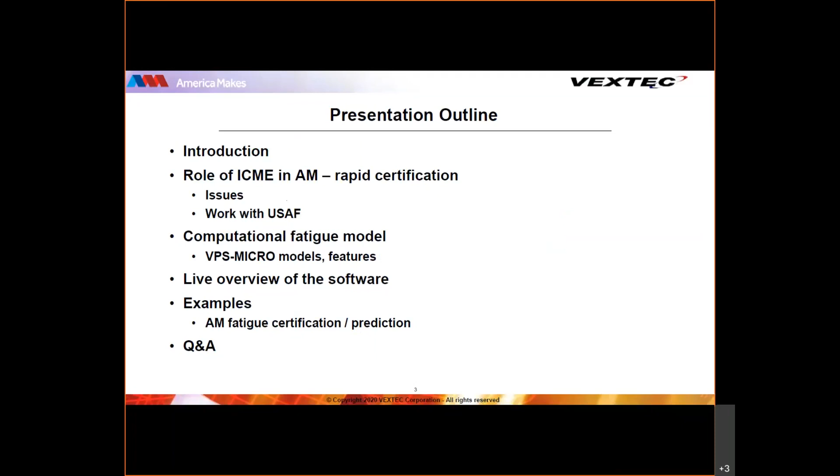I'll first hand the presentation over to Animesh, who will give you a brief introduction of our company, as well as describe what we mean when we talk about incorporating ICME into an AM certification process. We'll also discuss our ongoing AM work with the U.S. Air Force. Then you'll hear from Bob as he introduces you to our ICME-based software, which is called VPS-MICRO. I'll return at the end of the presentation to go through a live demonstration of our software with a real-world example of an additively manufactured titanium alloy. And then we can wrap up with some questions. So, Animesh, the floor is yours.

Mike, as an introduction, Vextec is a software as a services company out of Nashville, Tennessee. As Mike said, our software is VPS-MICRO. It is a computational tool to predict the risk of failure from metal fatigue. And the value proposition for using VPS-MICRO is to supplement physical testing for accelerated part qualification with increased confidence.

Over the past 2 decades, we have successfully helped clients all over the world across different industries, ranging from aerospace, medical devices, heavy machinery, where the risk and potential consequence of metal fatigue failure can be high. This technology of ours has matured and been validated through several Department of Defense programs, and Vextec and VPS-MICRO is backed by 7 US patents. Next slide, please.

So taking a closer look at how our clients benefited, I mentioned earlier that the value proposition is to supplement physical testing. Specifically, VPS-MICRO has been successfully used in qualification of new materials. Often people refer to it as second sourcing as well. In a very similar vein, recently our clients have also used the tool to certify AM materials. Again, it is very analogous to second sourcing, where we're attempting to replace perhaps the original cast material with equivalent AM materials.

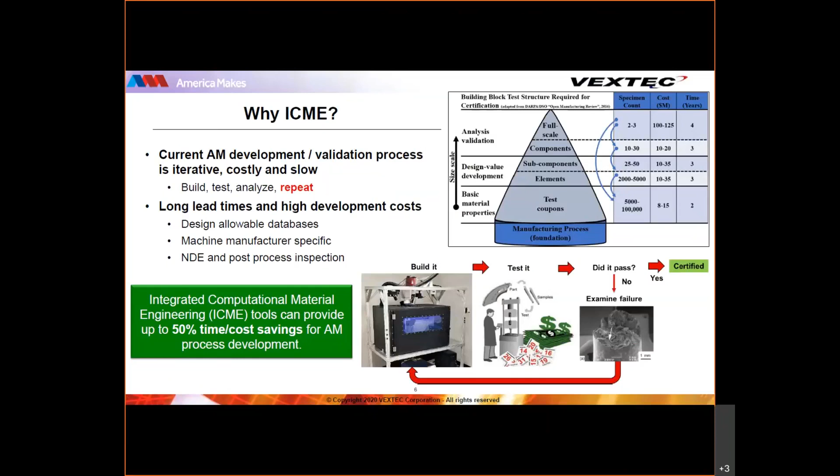So what do we mean when we say ICME-based certification? We are not changing the required elements of a certification process. Instead, the focus is to use simulation and appropriate software and computational tools to gain confidence in the build process. And then once one sufficiently understands the initial uncertainties and their sensitivities, especially in the context of AM, the speeds, the feeds, how it then impacts the resultant material microstructure variability. And then from the resultant microstructure, how does that impact the fatigue performance?

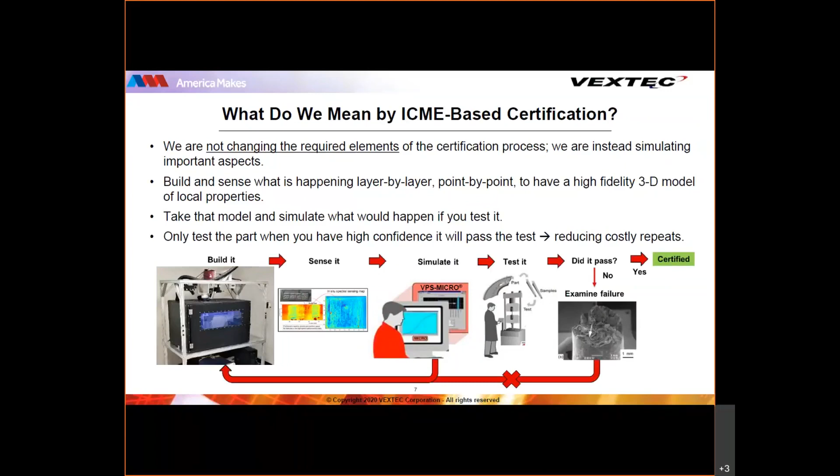If this cycle of build, sense during build, simulate, and then repeat till we gain adequate confidence, we should be able to accelerate the certification process. Next slide, please.

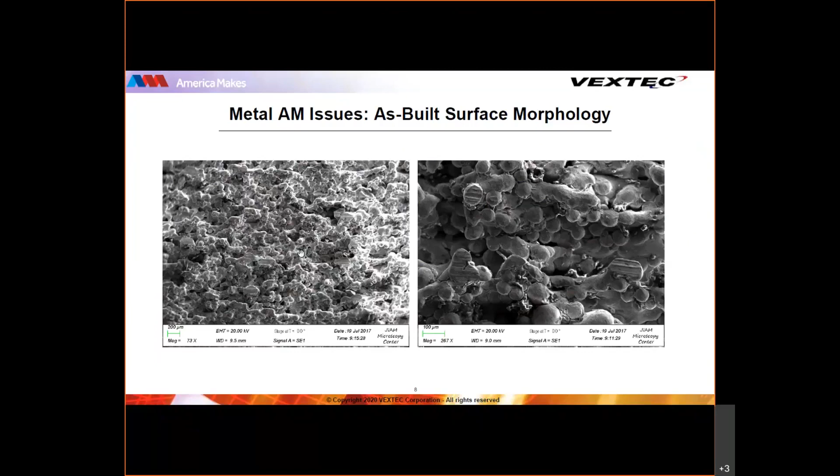So what becomes readily apparent in this kind of a modeling technique is those raised bumps are really not important as far as carrying the stress. They have the lowest stress. However, those holes, the ligaments and such, they are the ones where there is stress concentration. And if we can characterize the uncertainty in these stress concentration profiles, both in terms of the magnitude and the die out, and be able to incorporate this in a computational model, we should be able to computationally and distinctly predict how the rough surface would impact fatigue performance. And later you'll see Mike will show you an example of how this can be incorporated into the model.

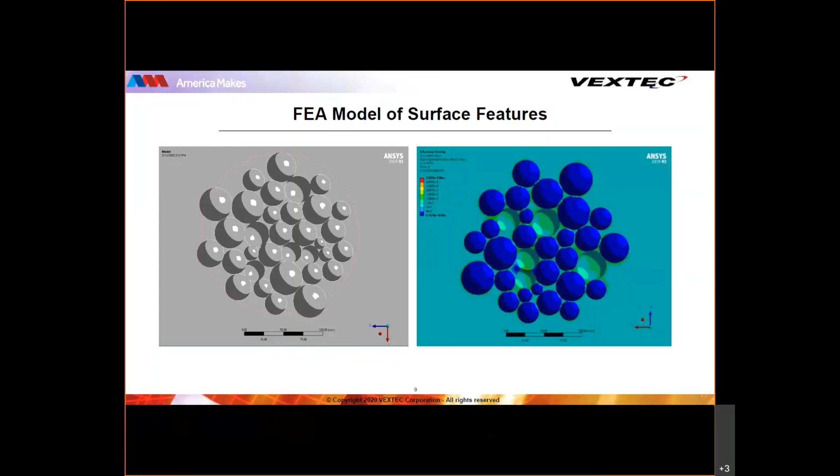And based on experimental data, it has been observed that when the build direction and the loading direction are perpendicular, this material exhibited higher tensile strength and a smoother fracture surface, as opposed to the other case where they were collinear or parallel. It had a slightly lower tensile strength. There were build defects that became active, and it had a rough fatigue fracture surface. Again, empirically and through observation, we understand that.

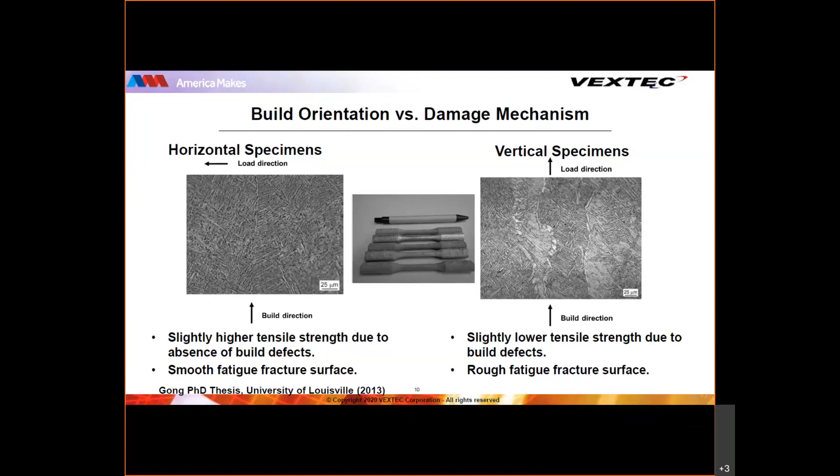Next slide, please. So all of these issues that I just mentioned are active areas of research, and Vextec is involved with the U.S. Air Force to investigate and formulate solutions based on mature software tools to see how these tools can be linked together in a computational sense to accelerate and scale up metal additive manufacturing.

One such program is with the Air Force Life Cycle Management Center, the Rapid Sustainment Office. Vextec is partnered with UTC and UDRI to create a rapid qualification framework for metal additive manufacturing. The goal here is to demonstrate where computational tools, from in situ sensing to looking at post-build microstructure and then eventually linking it to the fatigue performance, how can tools such as ours and others be used to accelerate and scale fatigue performance?

Another program with the AFRL is to look at specifically how, as I showed you earlier, surface morphology can be put into the model in a mechanistic or computational sense and characterize its sensitivity and resultant performance on fatigue properties.

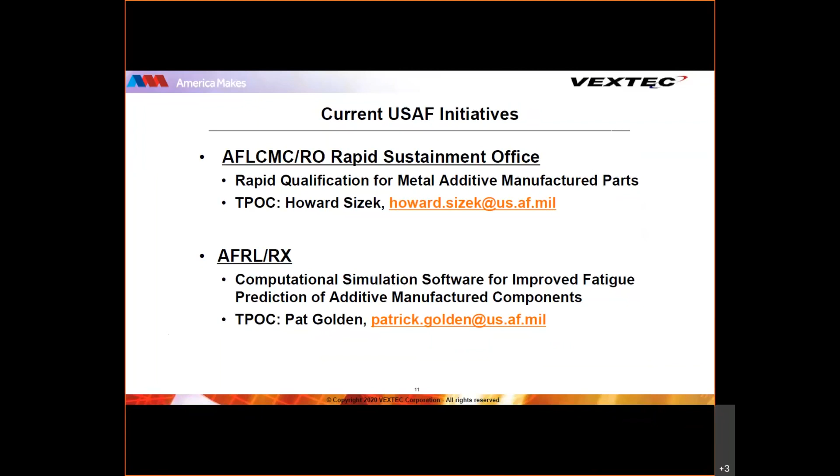So with that bit of preamble of what we mean by ICME-based certification and a few issues, I'll turn it over to Bob now, and he will give you a more in-depth overview of the VPS-MICRO modeling paradigm and underlying mechanisms. So Bob? Okay, thank you, Manimesh.

As Manimesh said, I'll give an overview of the software product VPS-MICRO. And just as FEA models the geometry and strength and loads of a macrostructure, VPS-MICRO models the geometry, strength, and loads of a microstructure. If you were to view a metallic product under the microscope, you would see this seemingly random arrangement of grains, grain boundaries, pores, inclusions, and such. And it is this microstructure that really governs fatigue cracking.

And it's the random nature of this microstructure that drives the large uncertainty that we see in fatigue lifetimes, which makes fatigue testing so expensive and time-consuming, because you have to test a lot of specimens for a long time to understand what the true minimum fatigue properties are. Now, how does all this go about affecting product certification?

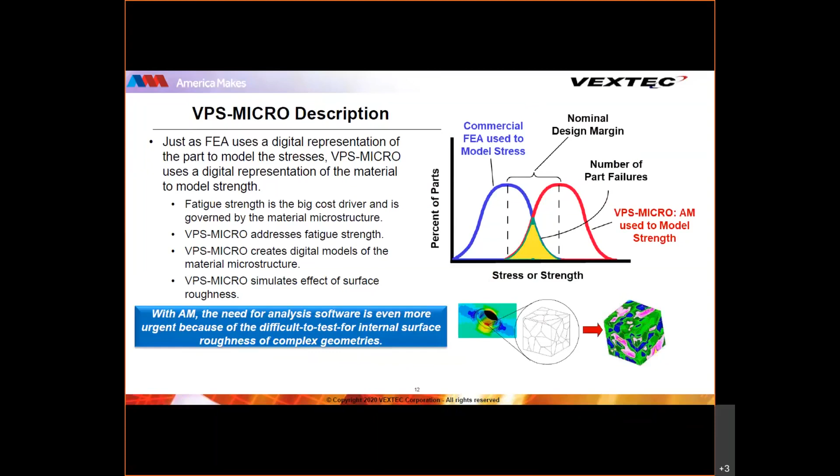So VPS-MICRO takes the traditional FEA-based structural analysis and superimposes at the elemental level the microstructure of the material to predict the statistical distribution of fatigue cycles to failure. And to do this, the software simulates the damage accumulation process, starting at the initial crystal plasticity to nucleation of a crack, to small flaw fracture mechanics, to linear elastic fracture mechanics. So it follows that process through its various stages.

And not only can this be used to predict the risk of failure of a structural feature, but it can also be used, in the design sense, to know what microstructure is allowable at each location of a part. And this is especially important in AM metal products where the microstructure can vary throughout the part depending upon where that location is on the build plate, how thick that particular location is, and during the processing, the heat transfer that takes place in the creation of that microstructure.

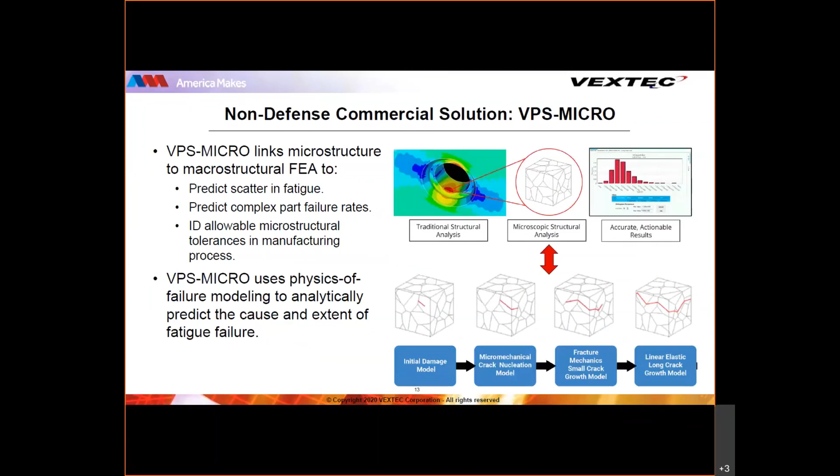Now, in recognizing the product failure as a process and not an event, and that there's much uncertainty in each stage of that process, to simulate the risk of failure, we need to propagate the uncertainty from process model to process model. By process model, I mean the actual failure process modeling, which can start with the uncertainty in the FEA model, including uncertainties in geometries and loading. And this is used along with the uncertainty in material microstructure, and also the uncertainty in the models themselves, modeling uncertainty, but propagating that uncertainty from all of its sources to the uncertainty in the final result, which is cycles to failure. And by considering the failure process, we're able to use all of the available knowledge.

And by using physics-based computational models, we're able to explicitly propagate uncertainty from various failure processes to the others. And then when new models or new data become available, the process modeling can be updated such that you can bring all of that new knowledge into it. And this is kind of what's going to be called the digital twin. And these are kind of the elements of the digital twin. So if you think about it, we're kind of building part of the digital twin of the AM product.

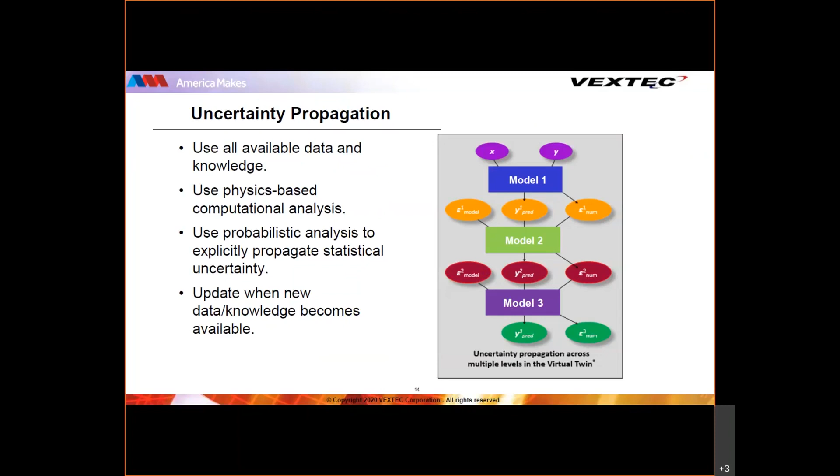And although connecting rods have been around for a century, and of course cast iron has been around for millennia, our customers have still been able to use VPS-MICRO to optimize the design of something as traditional as a cast iron connecting rod, because the model allows you to recognize that the material properties vary dependent upon the location of that casting. And you don't have to assume minimal material properties throughout the casting. And thus you can optimize and make lighter that connecting rod, which makes it easier to certify that rod for use.

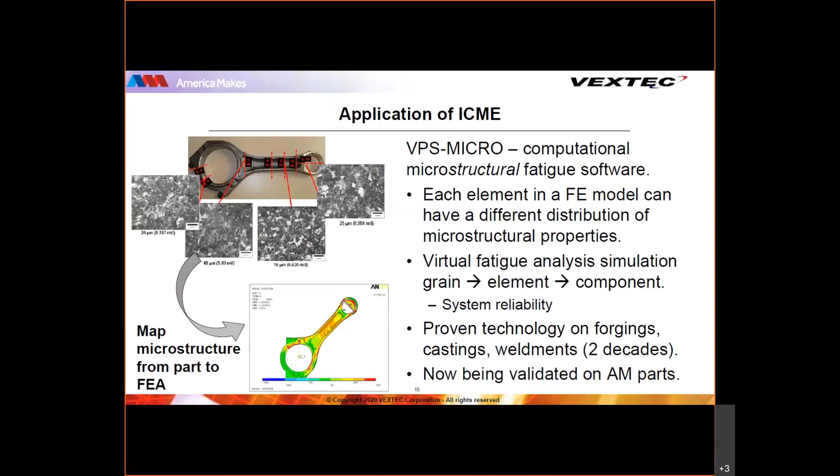And we've also noticed a lot of similarities with actual forgings, because we've found that the difference between a conventional process metal and AM metal can be captured through the quote-unquote microstructural definition. And here's a case where we've got a beta annealed forged Ti-6-4 from our material library, and it has many attributes similar to an electron beam melted AM Ti-6-4.

The difference is that there can be differences in grain sizes. A lot of times the grain size is an order of magnitude smaller because of the quick cooling rates of the EBM Ti-6-4, but also the effect of defects. And there can be trapped gas, porosity, unmelt particle inclusions. And if you can identify and capture those and put those into your model and use as a baseline the forged Ti-6-4, we've been able to model the AM Ti-6-4. And this is an example that I'm going to hand back to Mike, and he's going to actually show how we can go about doing this.

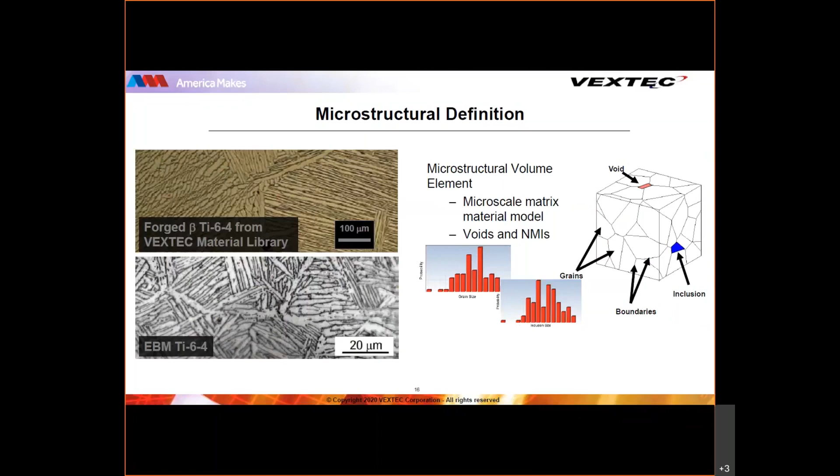We'll look at simulating 100 specimens for each load level, and if you think about how much time and cost that would take if you were to physically perform these 600 total tests, that's quite significant. We'll then move on to showing what simulations of EBM Ti-6-4 would be and how they would differ from the forged condition. So with that introduction, I'm going to move into the live software and give a quick overview.

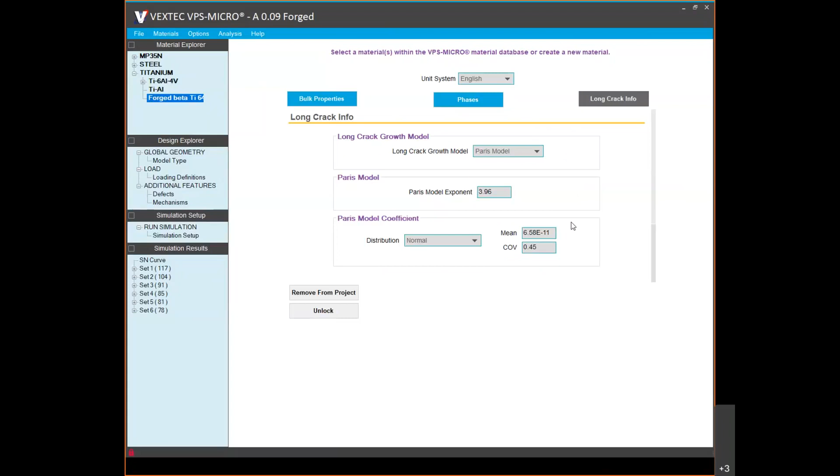And all of the dozen or so material property inputs that you see here are accumulated through standard ASTM type tests like metallography, tensile testing, fatigue crack growth testing. And the material parameters you see here are for our forged beta Ti-6-4 specimen. Below the Material Explorer, you'll see the Design Explorer. And this is where inputs such as global geometry are found.

As you recall from our example, we'll be modeling constant stress fatigue specimens with our gauge surface area of 0.09 square inches. If we wanted to model larger specimens, we could use the area factor here and put in a value greater than 1. If we wanted to model more complex geometries like notches, bolt holes, or the like, we could use outputs from a commercial FEA package like Abaqus and ANSYS. Vextec has developer partnerships with these organizations.

The next step in the Design Explorer is the Loading Definitions page, where we'll be defining the 6 constant amplitude load levels in our example as maximum and minimum stresses for each level. Here you can see additional options in the software for variable amplitude loading, sometimes referred to as mission loading or duty cycle loading, as well as gradient files. If a specimen or a component does have a stress profile, like surface roughness due to the AM process, as Animesh described earlier, or an induced residual stress due to surface enhancement, like shot peening, those can be accounted for here.

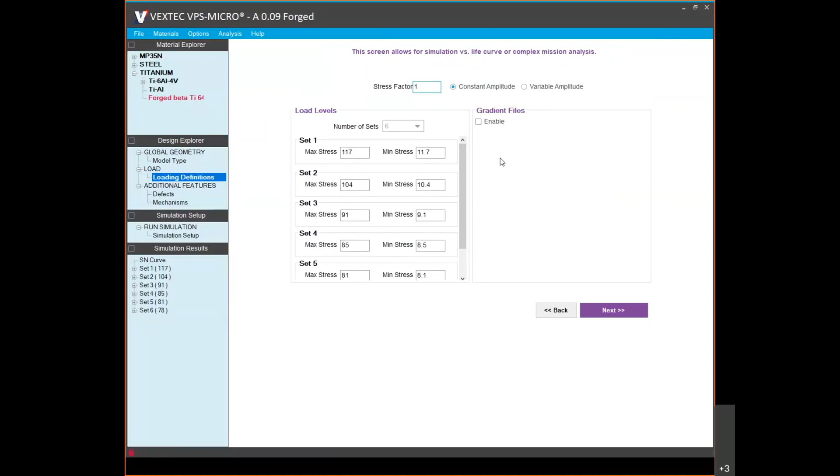And the final step of the Design Explorer are additional features like defects: the probabilistic population of these microstructural defects, the voids, the pores, inclusions, the non-melt areas, as Bob described. For our forged example, we have none of these. Also, there are asperity factors available, which model the tortuosity of the fatigue cracks as they propagate.

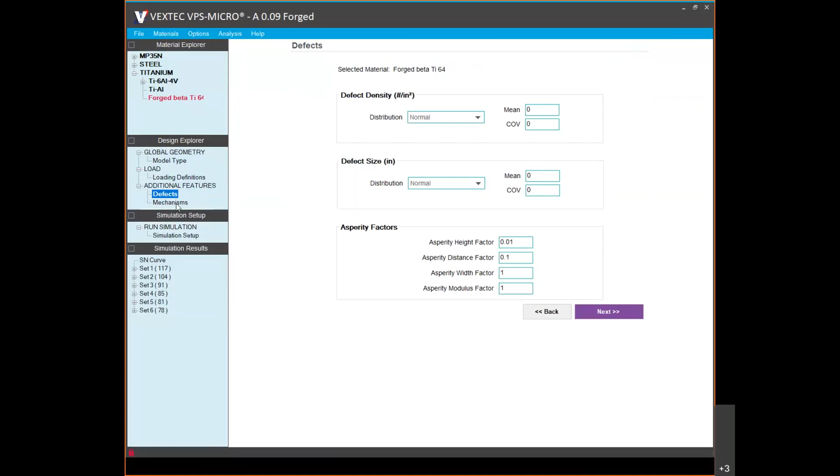Other features in the software include the options for computationally modeling the individual fatigue stages, the crack nucleation, small crack growth, and long crack growth, as well as custom geometry factors or beta factors in the fracture mechanics simulations that VPS-MICRO performs. So having put all of our inputs in the model for our example, this forged beta Ti-6-4 material, as well as the geometrical parameters of the fatigue specimen itself, we come to the simulation setup page. And this provides a summary of all of the main inputs for the model and lets you know if there's something missing before you commence running the simulations.

And as I said at the outset, we'll be simulating 100 simulations at each of our 6 load levels for a total of 600 simulations. After the run's complete, you would see a simulated SN curve for all 600 specimens. And if you look at the higher stress region, you can click into any one of the outputs. I can hover over the output and click into that, and I can see the individual simulation for that stress level.

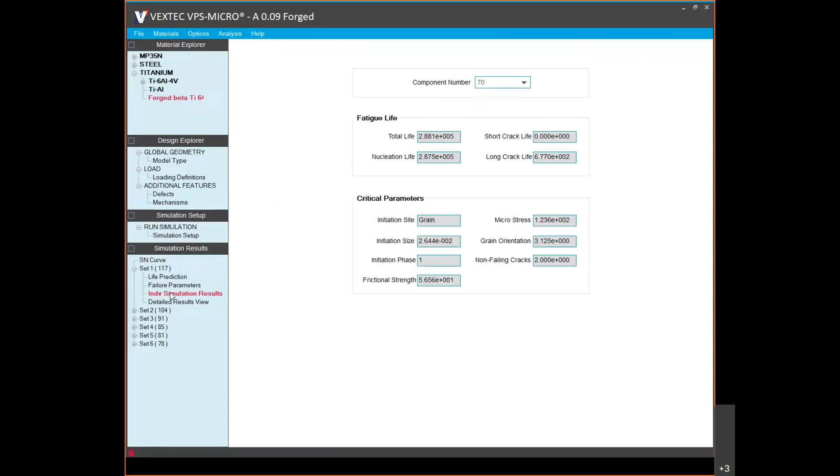It's number 70 out of 100, and it provides all of the critical information for that simulation, including the fatigue life and the components of fatigue life that make that simulation, how much time was spent in the nucleation stage, if there was a short crack stage, or if it transitioned directly to a long crack stage, and information like that. I can also, for any one of these simulations, in the results section at the bottom of the software, click into the life prediction histogram of all 100 specimens of the simulation, and you can see a histogram of the breakdown of the total life, the short crack life, and the long crack life.

And so you can computationally look at the results of each of these outputs in the software. I can also look at the failure parameters in a computational way, breaking up into the statistical histogram. All of these types of analysis of this output data can be used in a verification validation sense with test data you might have, so that your model can most accurately describe the conditions that you're seeing in a real

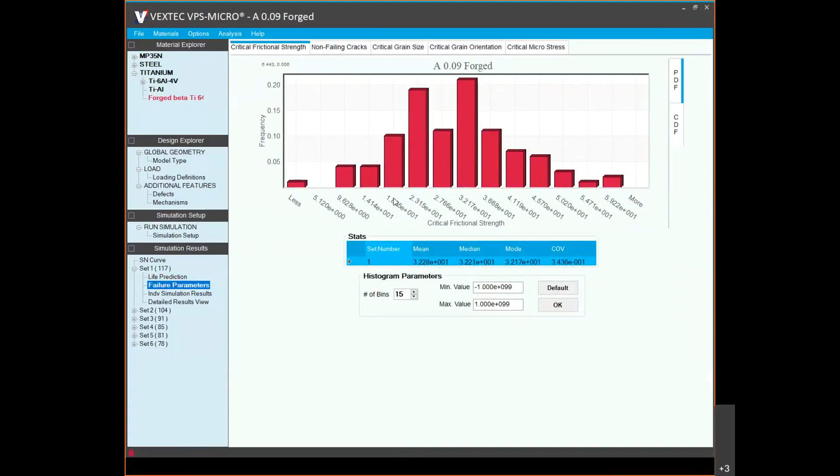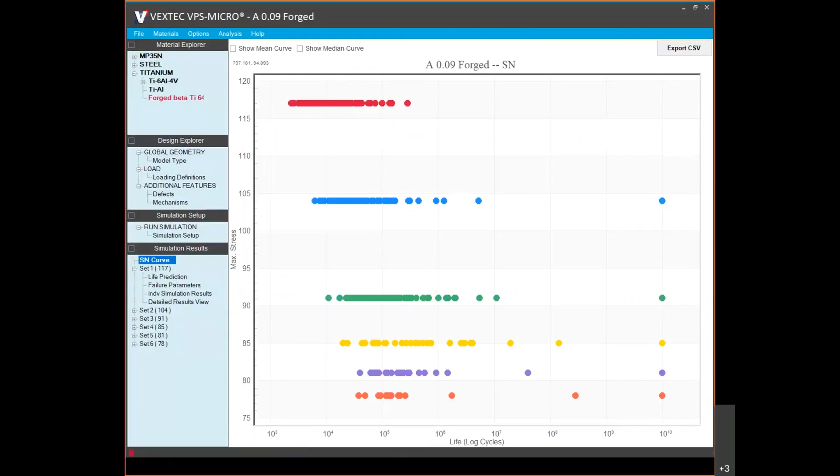world physical sense. And there's also a detailed results view, which basically is a large table of all of the outputs for that group of simulations at that load set. And you can export them to Excel for further post-processing if needed. So I'm going to go back to our simulated SN curve that you see here for all 6 of our load levels, and transition back to this information.

This is the same simulation information that we saw in the software, but I'm also plotting it against some forged specimen physical test data that we have. And the numbers that you see on the right-hand side of each of these load sets denote how many of the 100 simulations at each stress level were runouts or test suspensions.

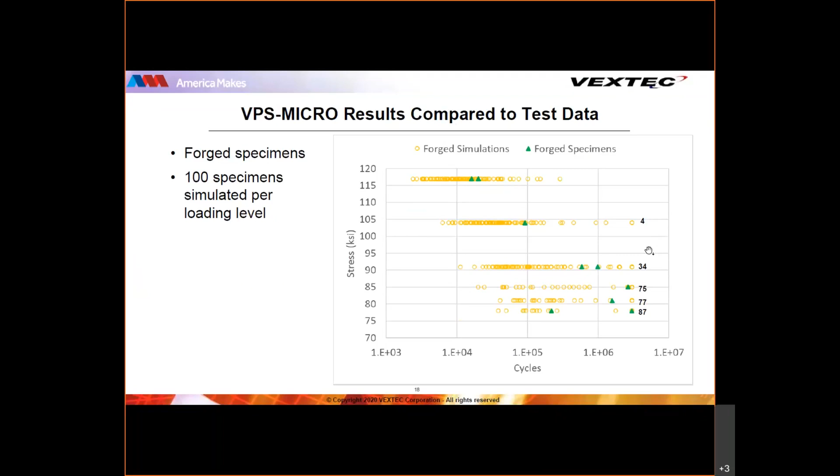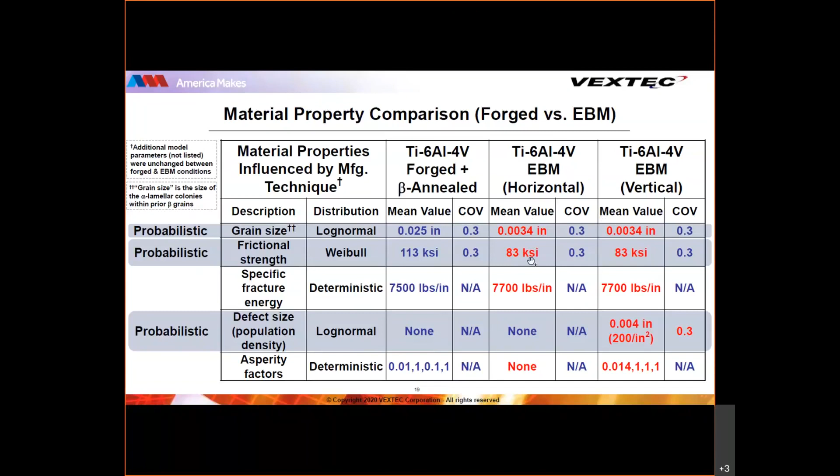These 5 parameters were identified as being different between the forged condition, which you see in this column here, and the EBM condition, which you see represented by the vertical build and the horizontal build in these columns here. And the values in red from the EBM samples are measured values. So those are things that have been measured by researchers, and so we've accordingly taken those measurements and updated our simulation model with these values.

of these computational models. And it's important to note that this can be scaled up from the specimen level, as we're looking at here, to the component level, where, as you might recall from the certification testing pyramid, to which Animesh referred at the beginning of our presentation, the necessary resources for those component level tests can be orders of magnitude larger in terms of time and cost.

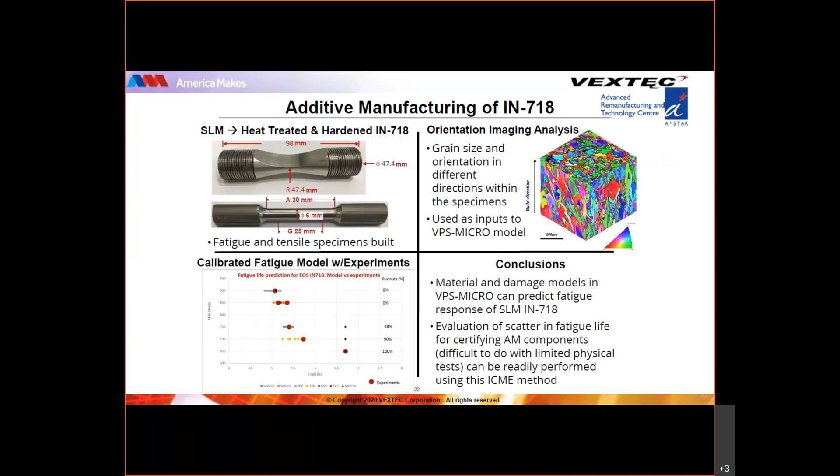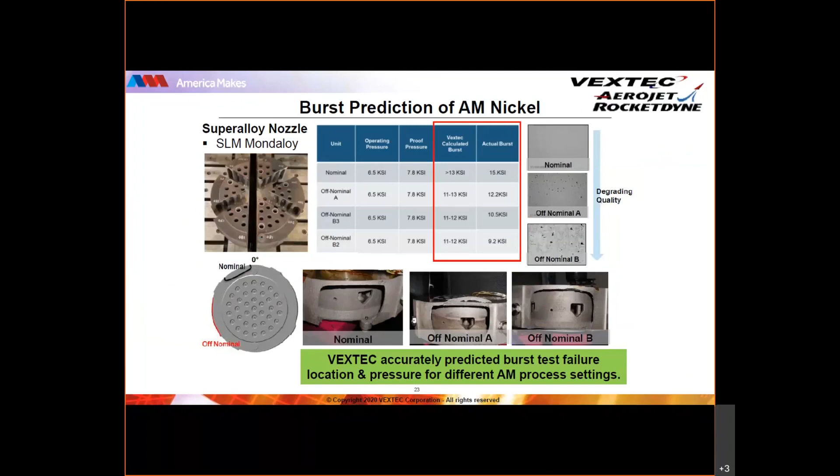And not only in matters of fatigue, we've successfully modeled other mechanisms in the failure spectrum, such as burst failure or overload fracture. Here with Aerojet Rocketdyne, we predicted the burst failure location and pressure magnitude for various AM process settings in Mondaloy. These settings produce different levels of quality in the material, vis-a-vis how many pores and voids were present and their respective sizes, depending on the speed and feed of that AM process.

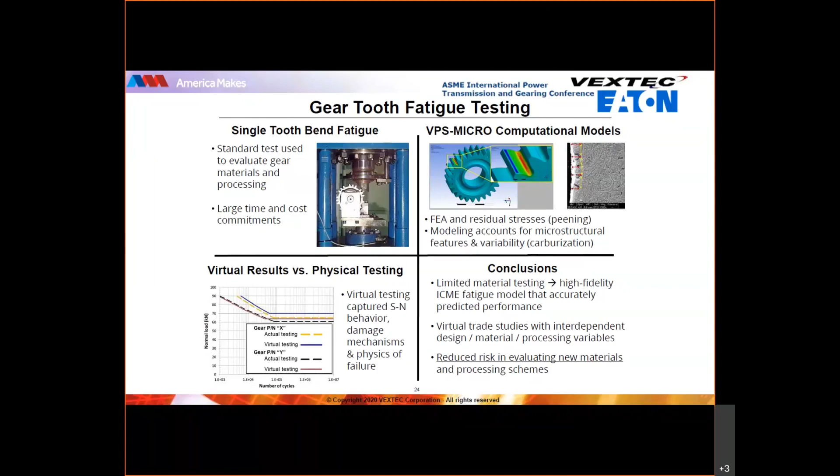And with Eaton Vehicle Group, we studied surface treatment effects on fatigue. Now, this wasn't specifically additive, but it does show a good example of how surface condition of the same alloy can have an impact on fatigue performance. So the Eaton Vehicle Group built gears for single tooth bend fatigue, but surface treated them differently. And we were able to characterize and model those. And if those can be characterized sufficiently, the software can model the impacts that those differences in surface treatment have on prediction of fatigue.

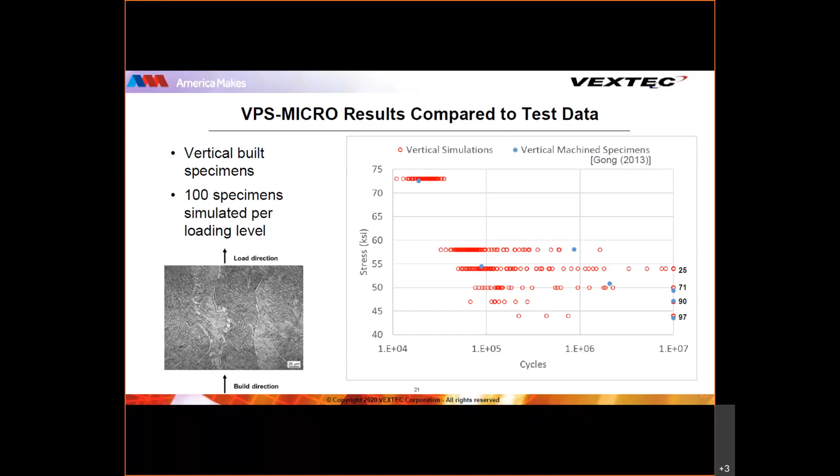All right. Excuse me. All right, so next question. When FEA stress is used, is there a way to align the orientation of the stress tensor to the build direction?

And I can comment on that. Now, when you're doing the FEA model, we just use standard ANSYS, Abaqus, and Nastran. Then, if you know what your stiffness matrix is, you can orient that stiffness matrix according to your stress tensor using those traditional methods. Now, in VPS-MICRO, we absolutely do that - it's a very important thing, and we've got a parameter in there called the orientation. So you put in the texture. If you were to do, say, an EBSD and find that there is a texture, and that texture has a relationship to the build direction, you put that into the software. There's a specific file that you pull in where you put your texture, and you can relate your texture to the loading direction when we're doing the fatigue modeling itself.

Yes. Okay, let's see. Can the user specify the confidence level of the resulting fatigue data? Animesh, do you want to comment on this one?